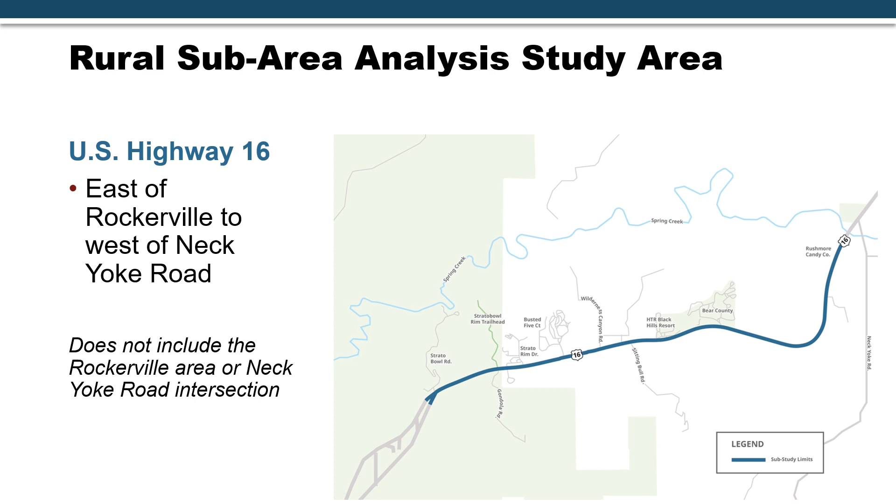The Rural Sub-Area Analysis is a sub-area of the overarching US Highway 16 Corridor Study that was completed in 2021. That study extended from the Keystone Wye to the Cathedral Drive Fairmont Boulevard intersection in Rapid City. This sub-area analysis builds upon the overarching Highway 16 Corridor Study to provide further refinement of concepts and public outreach as the South Dakota Department of Transportation works towards implementing recommendations in a future project.

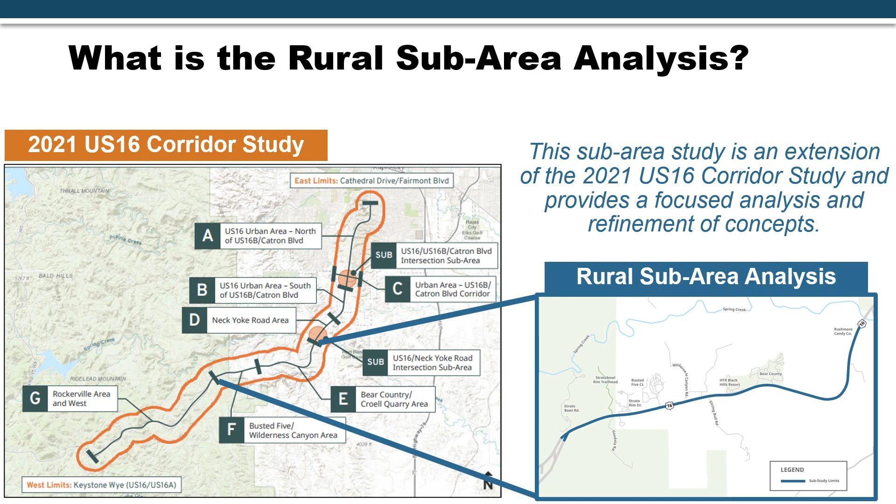Objectives of the Rural Sub-Area Analysis include updating the baseline conditions analysis, refining concepts carried forward from the 2021 US Highway 16 Corridor Study, incorporating stakeholder and public feedback throughout the process, and recommending improvements that will feed into a project the South Dakota Department of Transportation currently has planned through this sub-area within their 8-year developmental program.

And those objectives correlate with tasks in the study schedule, which is quick. We are currently in the final phase of the study to present preliminary recommendations for your review and feedback. The study team will take public input into consideration in the final step, where we will make final adjustments to concepts and recommendations, and then draft the final report.

The second part of the presentation is presenting a draft project purpose and need, which is essentially answering the question, why is a planned project necessary? The draft purpose of the project is to address local and regional trips along the Highway 16 corridor, reduce traffic congestion from continued growth and urbanization, and improve safety by addressing movements at intersections.

And this addresses the overarching needs of system connectivity and the importance of the Highway 16 corridor for local and regional trips, anticipated traffic growth throughout the corridor, and reducing angle conflicts and simplifying traffic movements.

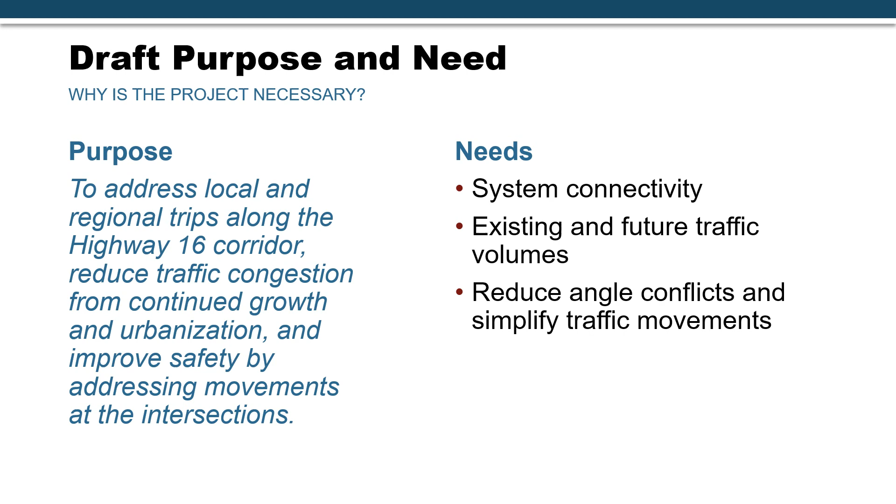Safety needs were reviewed through reported crashes between the years of 2018 and 2022. The figure shown on this slide reflects the crash density of all reported sub-area crashes excluding vehicle-animal crashes. The density figure combines crash frequency and location to help identify areas for further investigation.

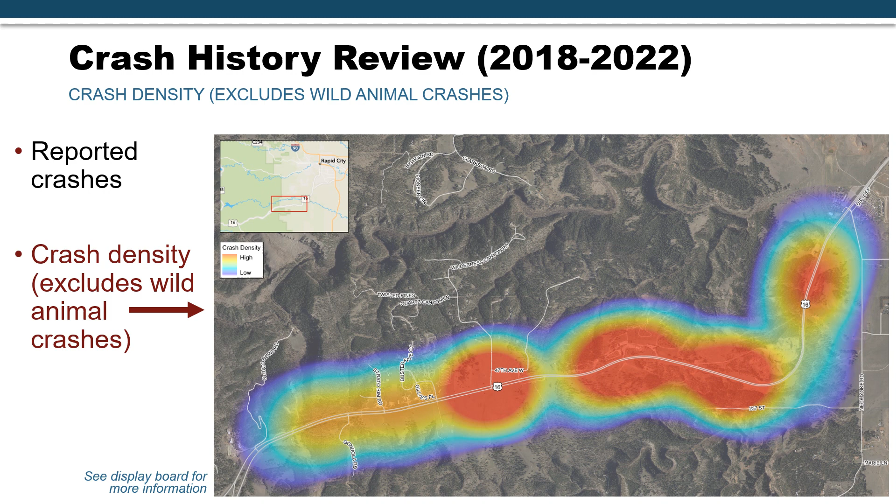Intersection crashes continue to follow similar trends as identified in the 2021 US Highway 16 Corridor Study, with rear-end crashes and angle crashes occurring at conflict points throughout the corridor. Angle crashes are a crash type of heightened concern as they often result in severe injuries due to the nature of the collision. As shown in the figure, angle crashes are prevalent and have occurred at most access points through this segment over the last 5 years.

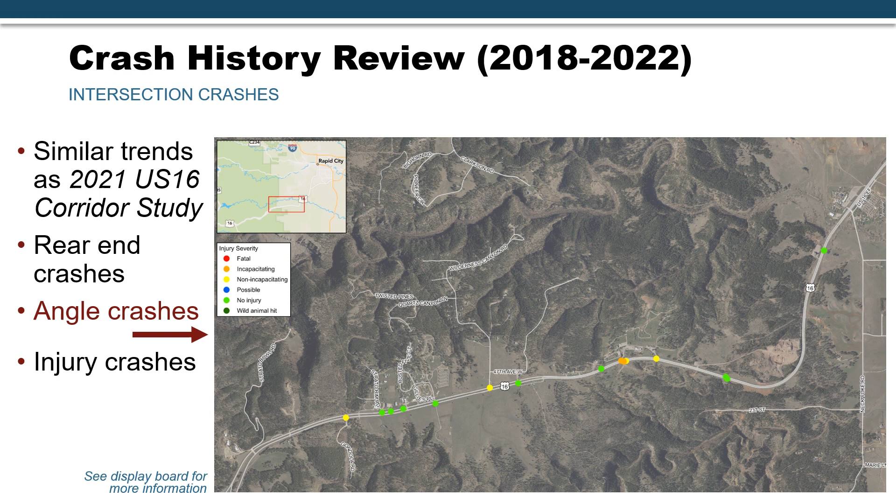The propensity for angle crashes resulting in injury and serious injury is most apparent when looking at the last 10 years of reported crashes within the sub-area. Over this time, there have been 29 reported angle crashes between Gondola Road and the Croell Quarry access. 19 of those angle crashes, or approximately 66%, resulted in an injury. 6 of the 29 crashes, or approximately 21%, resulted in a serious injury or fatality.

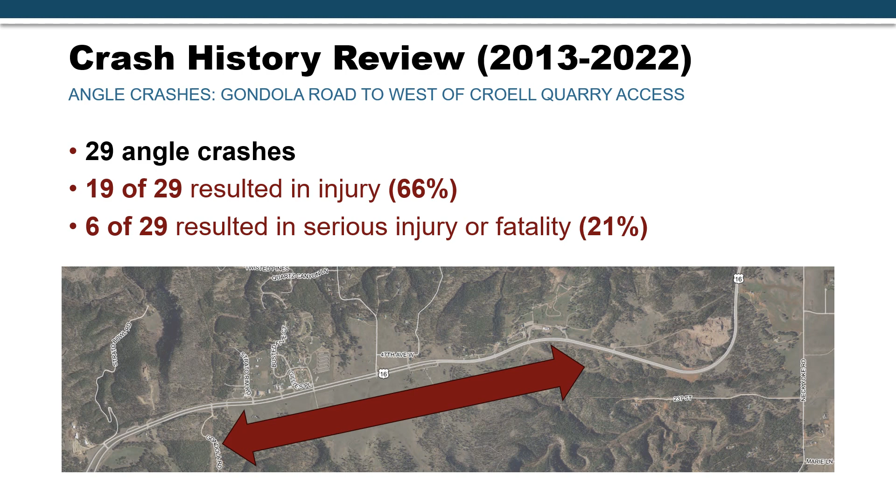The traffic volume development process included collecting traffic counts at 13 intersections in July of 2023, and then forecasting 25 plus years of traffic growth using standard planning methods that incorporate future land use, historical corridor growth, and feedback from developers and government representatives. In general, the 2050 planning traffic forecasts reflect upwards of 65% growth on Highway 16 when compared to today's volumes.

It should be noted that traffic volumes presented in this study reflect a typical summer tourist season condition with a mix of daily commute traffic and seasonal traffic.

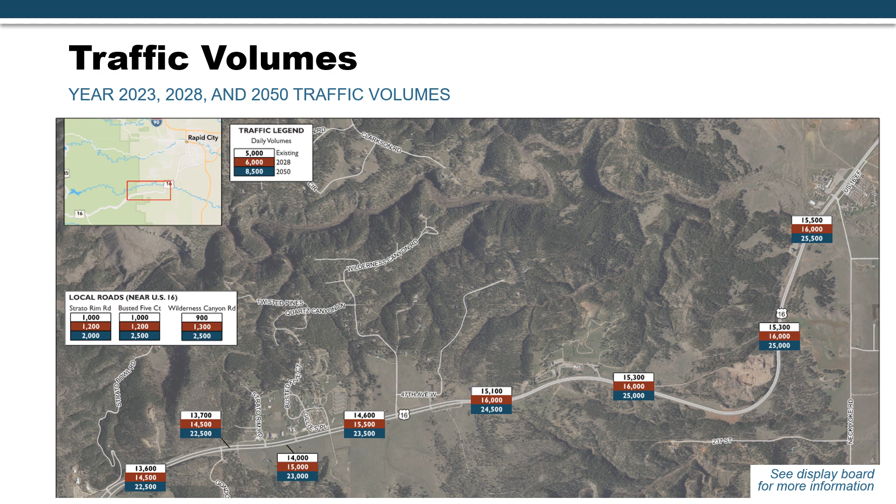Current daily traffic volumes range from around 13,000 to 16,000 on Highway 16 within the sub-area. The 2050 planned horizon traffic forecasts reflect growth of upwards to 26,000 vehicles per day just west of Neck Yoke Road. The traffic operations analysis establishes the long-range intersection improvement needs, which arise through two contributing factors.

One is a continued growth of general Highway 16 traffic passing through the study area, which we saw in the previous slide. It will become more and more difficult to find acceptable gaps to turn onto Highway 16 from a side street. The second contributing factor is the anticipated growth in side street traffic, which only exacerbates the delay and can lead to drivers taking more risks, which in turn leads to more crashes and highlights the correlation between operational and safety needs through the area.

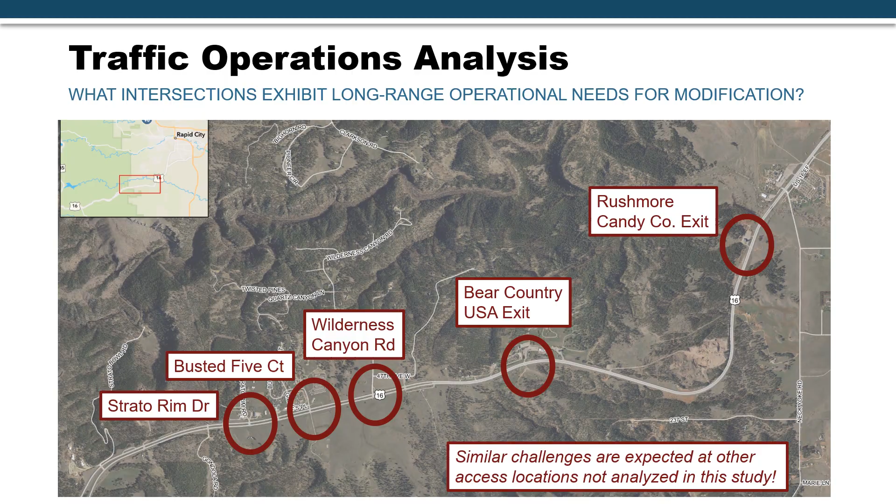The third part of this presentation provides a brief overview of the revised conceptual layouts. Please see the open house portion of the public meeting or the study website to review these layouts in more detail and what changed from November's open house.

Within the intersection concepts, there are three primary intersection types being considered. The first is a conventional intersection, similar to what is out there today, where all movements are provided at a single median opening and is stop controlled from the side street approaches. Conventional intersection concepts generally include adding turn lanes and/or median acceleration lanes.

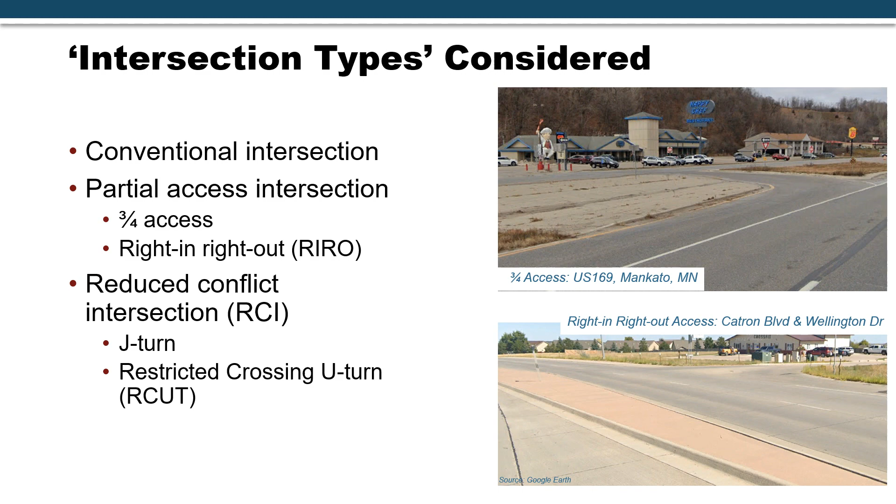The second intersection type is a partial access, where certain movements are restricted within the intersection. This includes a three-quarter access where crossing and left turn movements from the side street are not provided, or a right in right out access where only right turns into and out of the access are accommodated. The third intersection type is a reduced conflict intersection, or RCI, which is also sometimes called J-turn or an R-cut.

RCIs are an alternative intersection type that simplifies traffic movements to allow motorists to focus on one direction at a time and eliminates left turn and through movement angle conflicts for vehicles entering the intersection from the side street. As shown in the figure, all side street traffic turns right from the side street approach to enter the intersection.

Side street traffic wanting to head through the intersection or turn left can turn directly into a median auxiliary lane and travel down to the U-turn location outside of the two higher speed through lanes on the highway. Traffic then makes a U-turn and travels back to the main intersection where they can either turn right or continue straight on the highway.

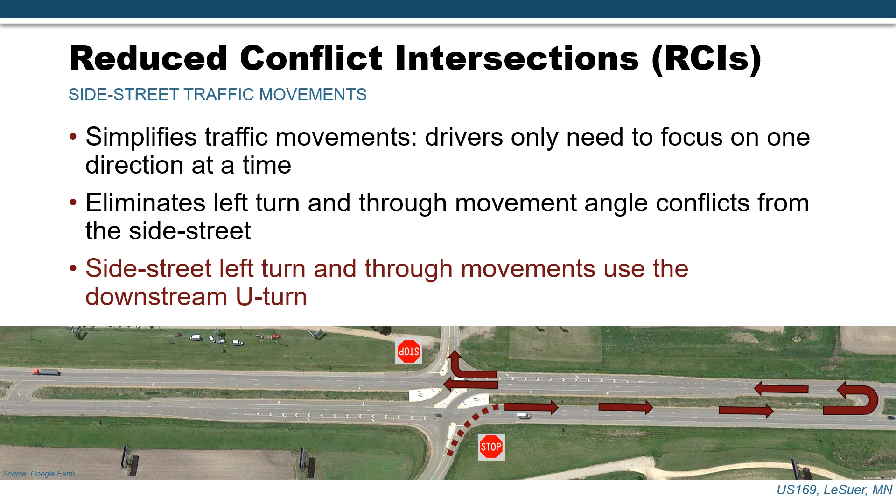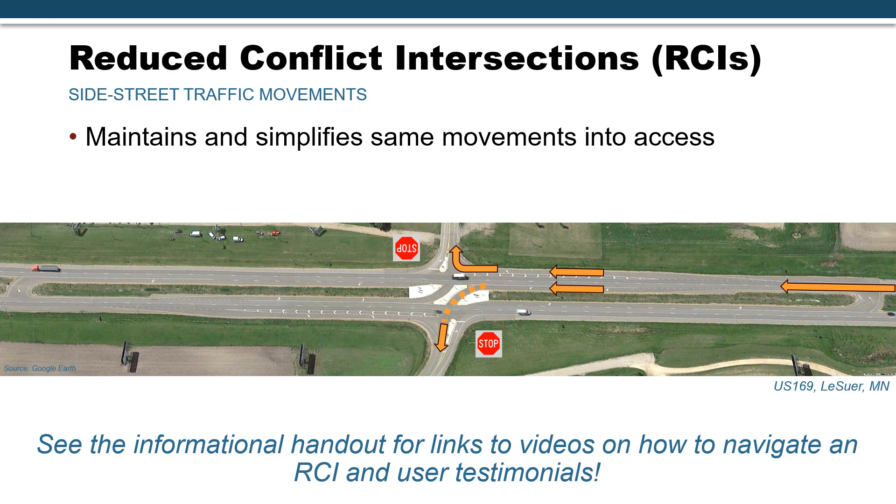Intersection movements are also simplified for traffic turning from the highway to the side street. Both the left and right turns into a side street or driveway access occur at the main intersection, but the left turns are channelized to eliminate conflict points within the median, and right turn lanes are offset to provide enhanced sight distance for right turning traffic at the side street stop signs.

Conceptual layout scenarios are grouped in the following four areas: the Strato Rim, Busted 5, Wilderness Canyon area, the HTR Black Hills Resort area, the Bear Country USA area, and the Rushmore Candy Company area. We would like to note that each concept has been revised since the last public meeting open house to incorporate public, stakeholder, and study advisory team feedback.

The Strato Rim, Busted 5, Wilderness Canyon area Scenario A reflects three RCIs constructed at those main intersections and on the existing Highway 16 alignment. Similar to the other concepts, these main intersection RCIs provide the framework for full access intersections that future area development will need to tie into.

Scenario B reflects modifications to existing Strato Rim Drive, Busted 5 Court, and Wilderness Canyon Road intersections to add turn lanes and median acceleration lanes for side street left turns to head towards Rapid City. Scenario C is the first of three RCI concepts that shift the Highway 16 corridor to the south to provide room for a frontage road on the north side for driveway access.

This first concept combines the Strato Rim Drive and Busted 5 Court intersections to a single RCI and centers it between those two roadways. An RCI is also provided at Wilderness Canyon Road. The Highway 16 alignment is shifted south to provide 250 feet separation between the frontage road and Highway 16 travel lanes.

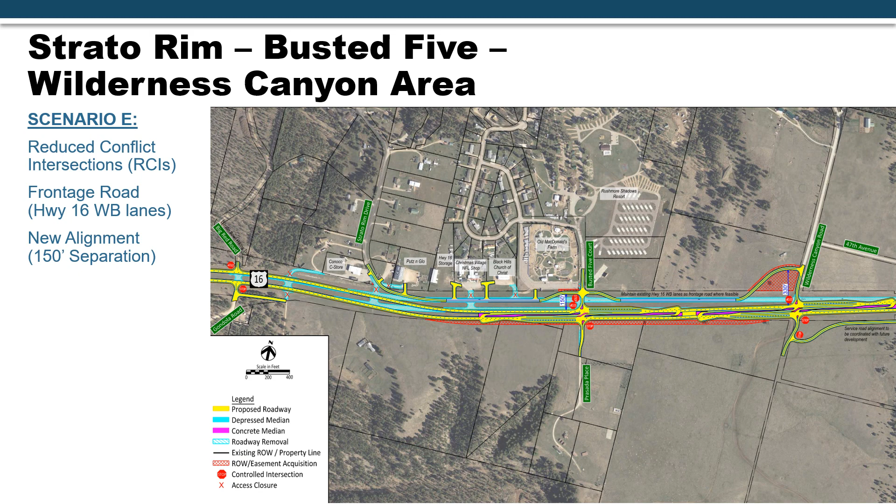Two U-turn options were developed for a westbound to eastbound U-turn for Strato Rim trailhead traffic wanting to head east from the trailhead parking lot. One option includes the existing Strato Bowl Road intersection, and the second is the closest feasible location west of the trailhead access.

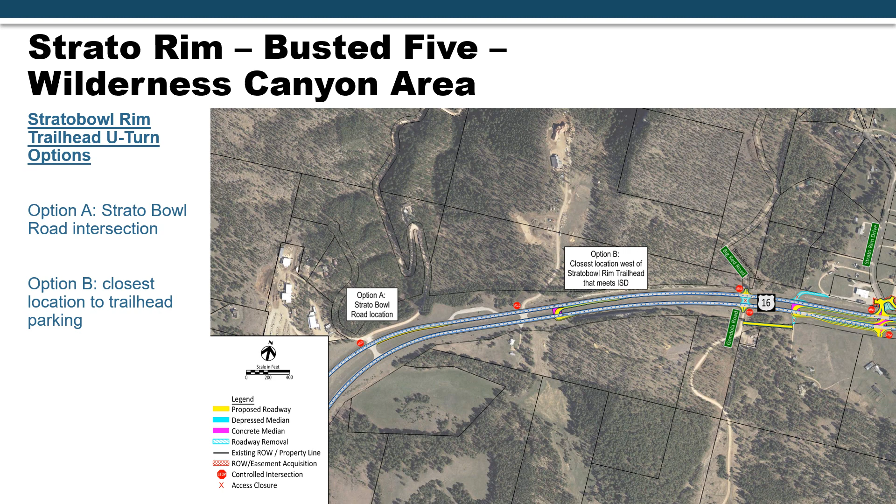The HTR Black Hills Resort Area concept refinement resulted in 4 scenarios that exhibit a mix of RCIs, partial access, and closures. Scenario A is the most restrictive form from an access management standpoint, with only providing 3-quarter or right-in right-out access. Scenario B incorporates an RCI at the HTR Black Hills main driveway and a 3-quarter access at the House of Scandinavia access and Sitting Bull Road intersection.

Scenario C provides an RCI at the HTR Black Hills main access, but shifts the U-turn west to the top of the hill to provide enhanced sight distance for U-turning traffic. A 3-quarter and right-in right-out access are provided at the House of Scandinavia and Sitting Bull Road intersections, respectively.

Scenario D also provides an RCI at the HTR Black Hills main access, but shifts the main access driveway to the east to provide greater sight distance for U-turning traffic within the RCI. A 3-quarter access is provided at both the House of Scandinavia and Sitting Bull Road.

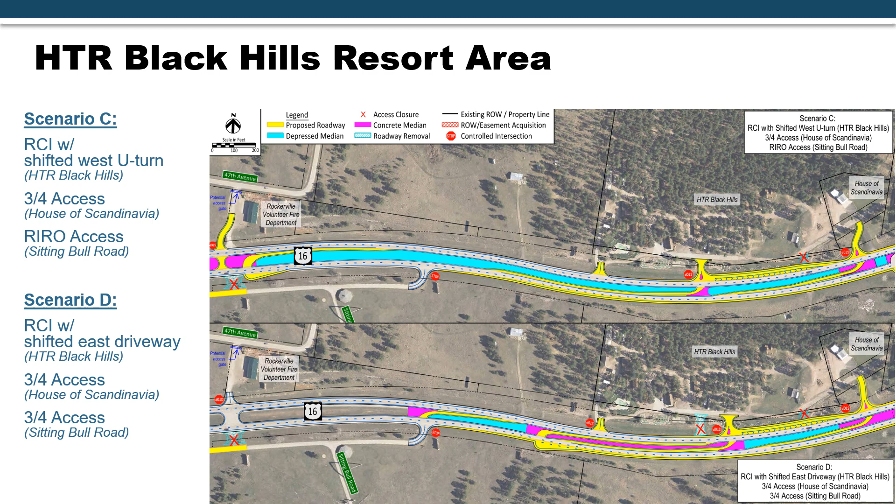The Bear Country USA area concept constructs an RCI at the Bear Country exit and a 3-quarter access at the Bear Country entrance. And finally, the Rushmore Candy Company area concept incorporates a right-in right-out access at the northern access and an RCI at the southern access. The southern access is shifted slightly to the south to provide US16 access to all 3 parcels that come into a point in that area.

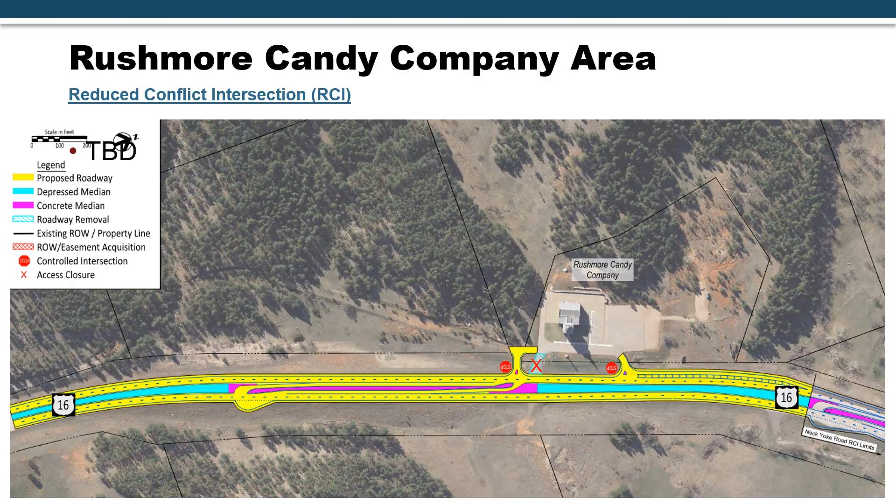The fourth section of this presentation focuses on preliminary recommendations for Highway 16 subarea corridor segments. Intersection type recommendations and supporting information will be presented first, followed by recommendations for the specific conceptual layouts.

The study team is recommending that all subarea intersections designated as future full access intersections be modified to incorporate a reduced conflict intersection, and all other access points be modified to partial access intersections such as a 3-quarter access or right-in right-out access. Traffic patterns impacted by the turn restrictions at partial access locations will be accommodated at a downstream U-turn within one of the RCIs.

The 2 exceptions include the Rockerville Volunteer Fire Department access and the Croell Quarry access. Both have unique circumstances where it is beneficial to maintain the median break that is currently out there today.

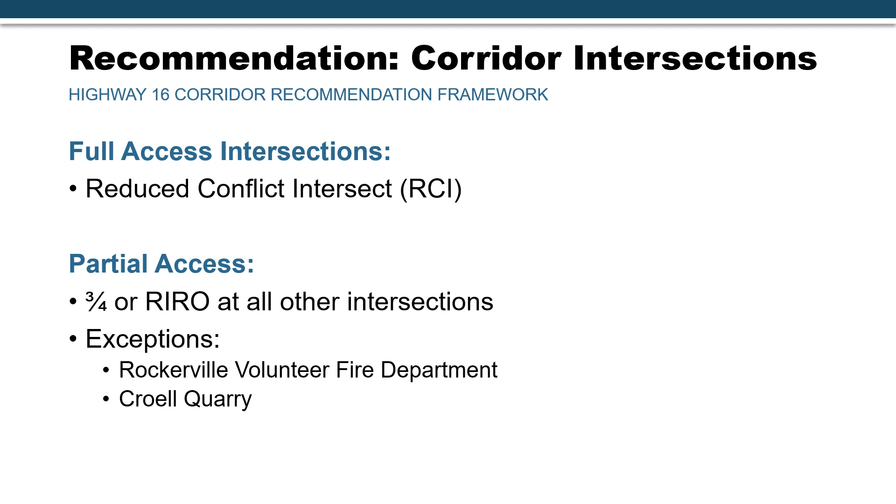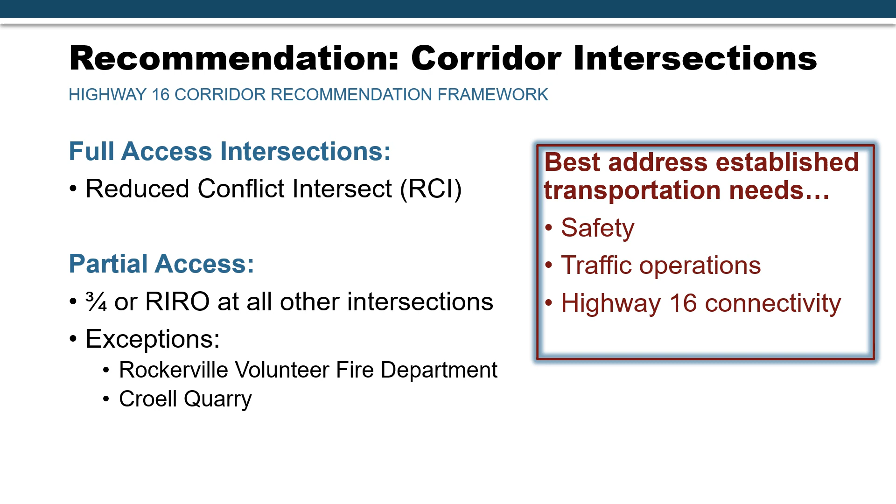These intersection recommendations best address the established transportation needs of safety, corridor and intersection operations, and Highway 16 connectivity through the subarea. It also prioritizes Highway 16 east-west through movement travel in accordance with the overarching 2021 corridor study. The following slides highlight data and analysis findings considered by the study team when developing these recommendations.

An RCI is one of 28 proven safety countermeasures identified by the Federal Highway Administration for their effectiveness in reducing roadway fatalities and serious injuries. The primary benefit of RCIs is a reduction in intersection conflict points, particularly left turn and through movement angle conflicts that have a propensity for high severity crashes.

A conventional intersection on a 4-lane expressway, similar to those on Highway 16, has upwards of 42 conflict points, with 24 of those being crossing or angle type conflicts. Depending on how an RCI is designed, the total conflict points can be reduced to 24 or even fewer. The most notable reduction is to angle conflict points, which are reduced from 24 in a conventional intersection to just 4 in an RCI.

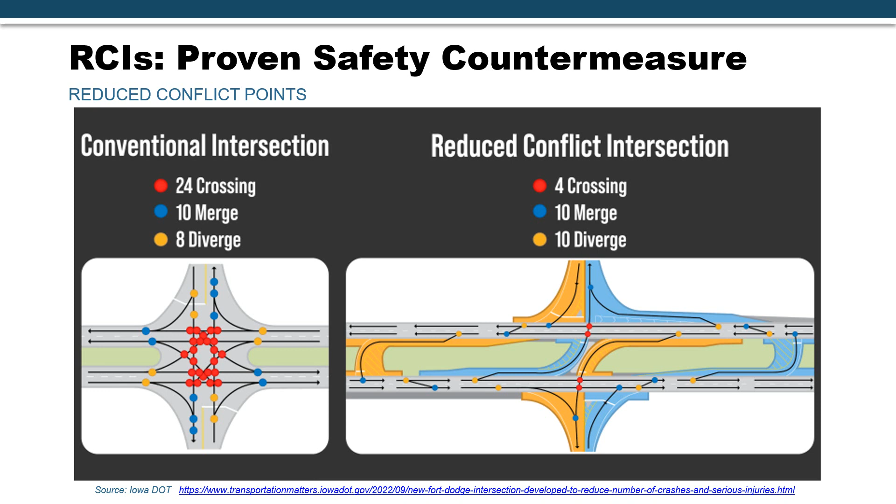A second benefit is that conflict points within RCIs are spread out across a considerably larger intersection footprint, and motorists only need to consider one direction of travel at a time, which considerably simplifies the driving process.

RCIs also provide the best traffic operations for travel through the Highway 16 corridor by prioritizing east-west free-flow travel and meeting driver expectancy and route continuity expectations for an expressway facility. RCIs are able to provide several full access intersections along the corridor for existing and future development and enhance traffic operations during high volume periods of the day.

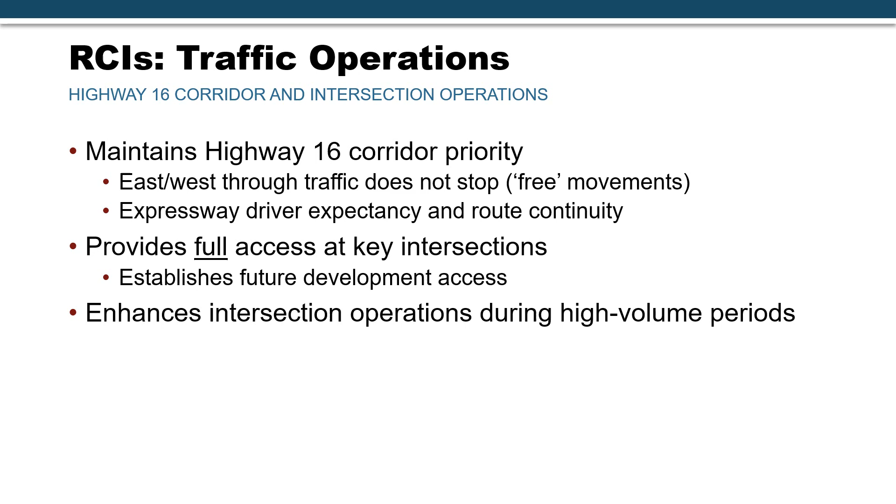The traffic operations analysis of an RCI under future year traffic conditions highlights the benefits of simplified navigation through the intersection. In year 2050 planning horizon volume conditions, it is expected that traffic wanting to turn left from the side street will be able to travel through an RCI U-turn and back to the central intersection quicker than waiting for a gap in two directions of traffic in a conventional intersection. The analysis shows a time savings as high as 40 seconds with an RCI to complete this movement.

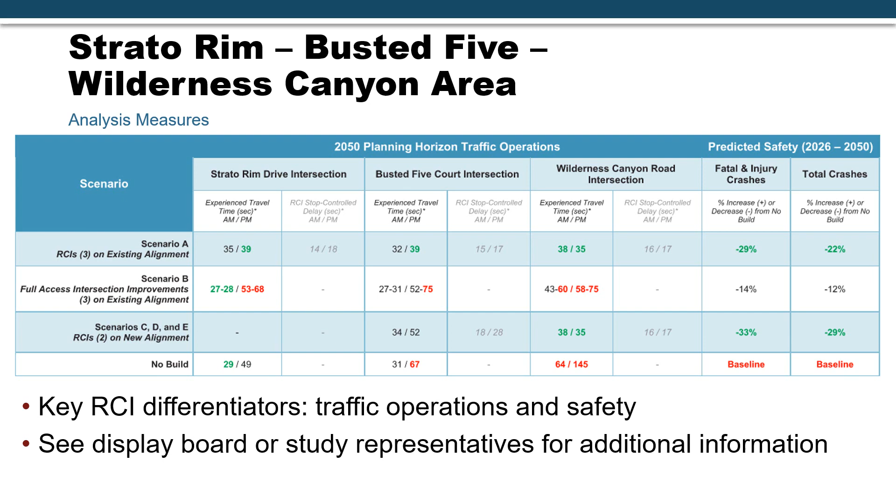The predictive safety analysis also highlights the benefits of reduced angle crashes, where scenarios with RCIs were expected to reduce fatal and injury crashes by upwards of 33% over the next 25 years. The following slides present the study team's preliminary recommendations for each of the 4 areas within the study corridor.

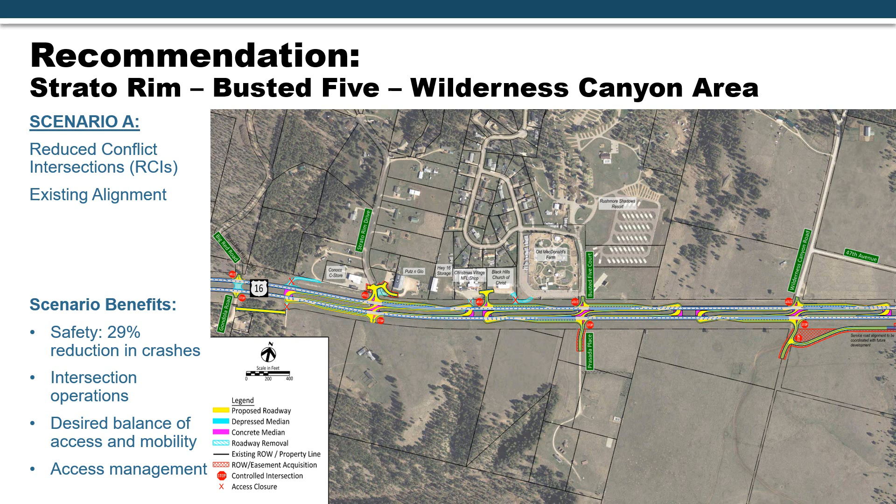The preliminary recommendation for the Strato Rim Busted Five Wilderness Canyon Road area is Scenario A. This scenario constructs 3 RCIs at the main intersection and incorporates access management through closures and right-in right-out access modifications. This scenario is recommended based on the safety benefits, intersection operations, achieving the desired balance of access and mobility, and the minimal impact to adjacent property north and south of the corridor.

In conjunction with the Scenario A preliminary recommendation, the study team is also recommending option B for a U-turn location west of the Strato Rim trailhead. This location is just west of the rock cut where a sight distance and flat area along the corridor is conducive for a U-turn. This reflects the closest feasible location west of the trailhead parking access for a U-turn location.

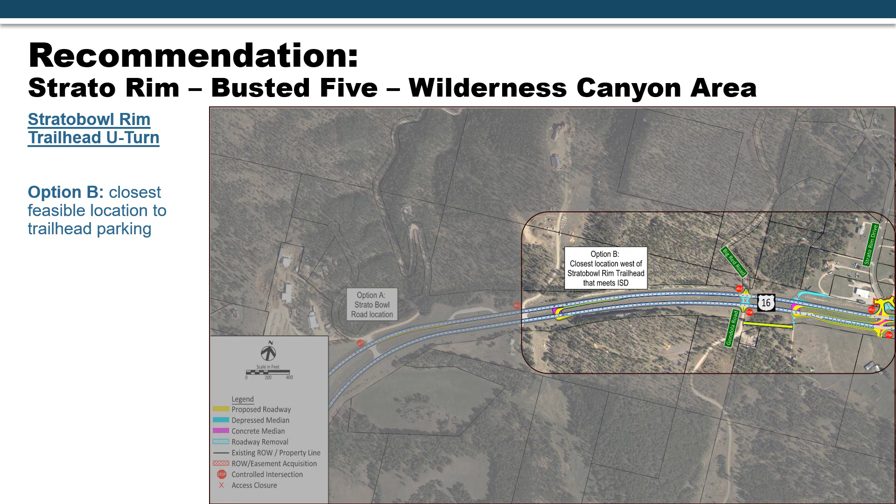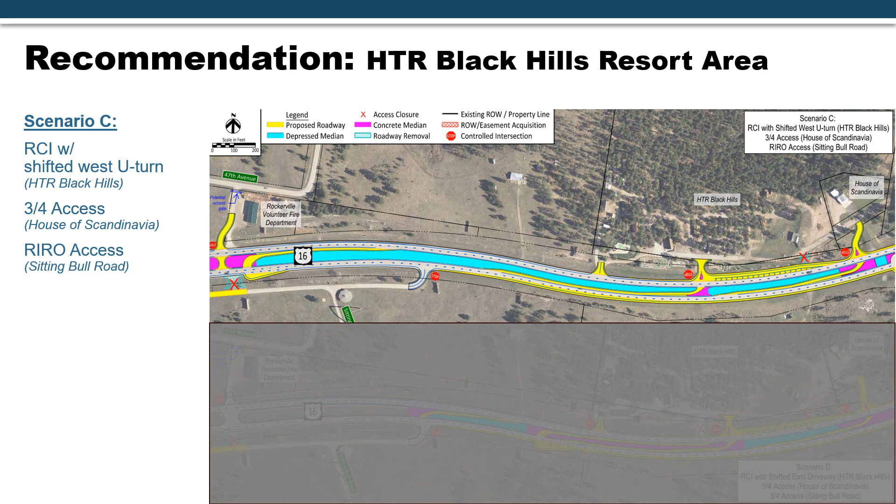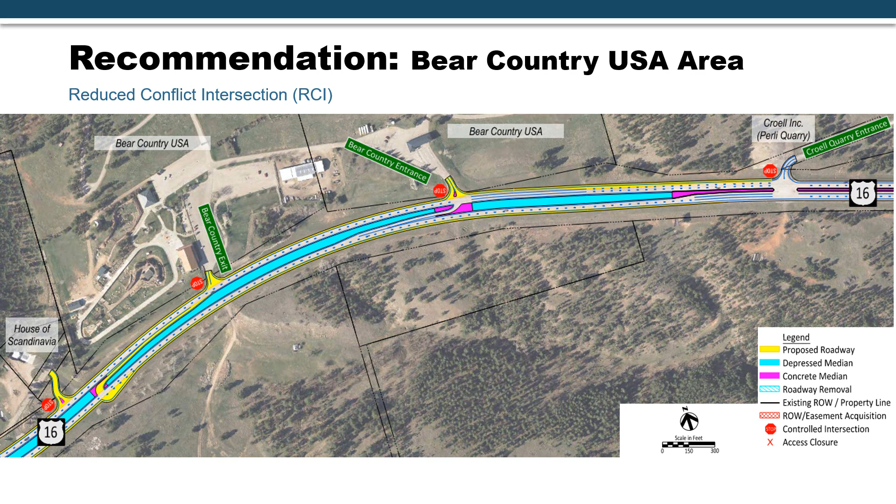The Bear Country USA area recommendation is the lone concept developed for this area, which includes an RCI at the Bear Country exit and a 3/4 access at the Bear Country entrance. And finally, Rushmore Candy Company area recommendations include a right-in right-out access at the north driveway and an RCI at the south driveway. The southern access point is shifted slightly to the south to provide Highway 16 access to all 3 parcels that come into a point in that area.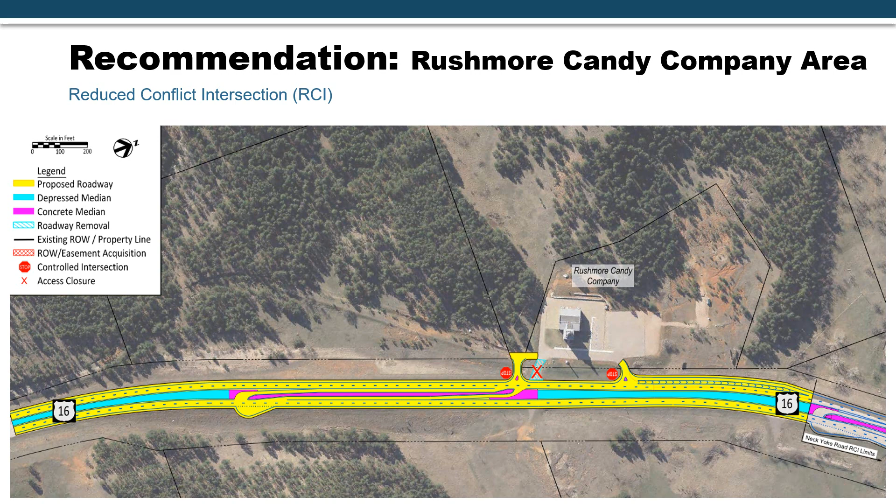Before closing the presentation, we would like to touch on a few common questions and comments the study team has received to date. We'd first like to note that the study team has done extensive research on best practices and lessons learned from other states and incorporated many of these elements into the presented concepts. Examples of these best practices include extending the median U-turn lane back to the main intersection, extending turn lane lengths within RCIs and at partial access locations to incorporate as much distance as feasible for vehicle deceleration, and accounting for significant roadway grade when applicable.

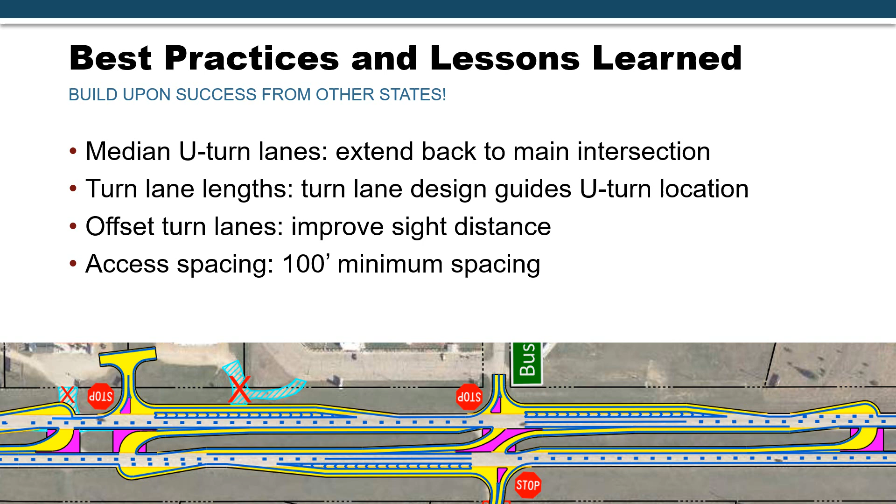For enhanced side street traffic sight distance, Highway 16 right turn lanes are offset from the through lanes to provide greater sight distance for traffic turning onto Highway 16. And also, access points have been separated from U-turn lanes by a minimum of 100 feet to help separate conflict points.

A common concern resonating from the comments received to date centers on whether trucks and RVs will be able to make the U-turn and that their slow turns will lead to crashes. First, we want to stress that large vehicles have been accounted for using current design guidelines that incorporate operational considerations, wider turn paths at U-turns, and appropriate intersection sight distance for slower turn movements.

A 2016 study completed by the Minnesota Department of Transportation and Iowa State University provides good insight on these concerns as well. Researchers monitored RCIs and conventional intersections to compare the exposure of large vehicles to oncoming traffic when completing turns, as well as the frequency of evasive maneuvers caused by these turns. The results of the study may be surprising. The exposure of large vehicles completing a turn within a conventional intersection is greater than those within RCIs, even for the U-turn movement.

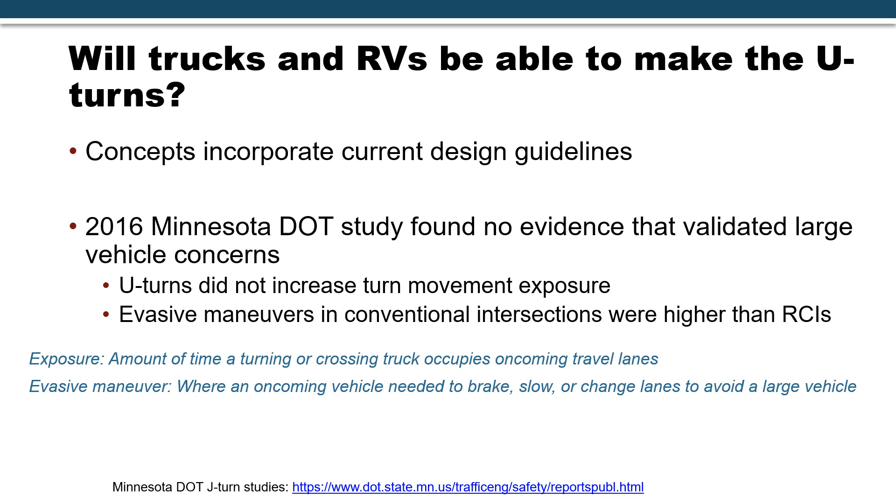A second key part of this is that the exposure conflict within a conventional intersection is more likely to result in an angle crash, while the exposure conflict in RCI is more likely to result in a rear-end or sideswipe crash. When reviewing evasive maneuvers, it was found that the conventional intersections had a rate of evasive maneuvers that was twice that of the analyzed U-turn locations. The study concluded that there was no evidence that validated concerns of large vehicle operations at RCIs.

Another question is, will RCIs work with future development? And the answer is yes. The recommended RCIs establish the full access intersections for future development along the corridor. From an operations standpoint, RCIs are better able to grow with traffic than a conventional intersection. The traffic operations analysis shows that at the higher volume RCIs in particular, the side street RCI operations continue to operate acceptably well after those same movements fail in a conventional intersection under the same traffic conditions.

Further, an unsignalized RCI prolongs the need for signalizing intersections in this area. It is recommended that the South Dakota Department of Transportation, Pennington County, property owners, and developers all work together to enhance internal connectivity and help balance traffic across multiple full access intersections.

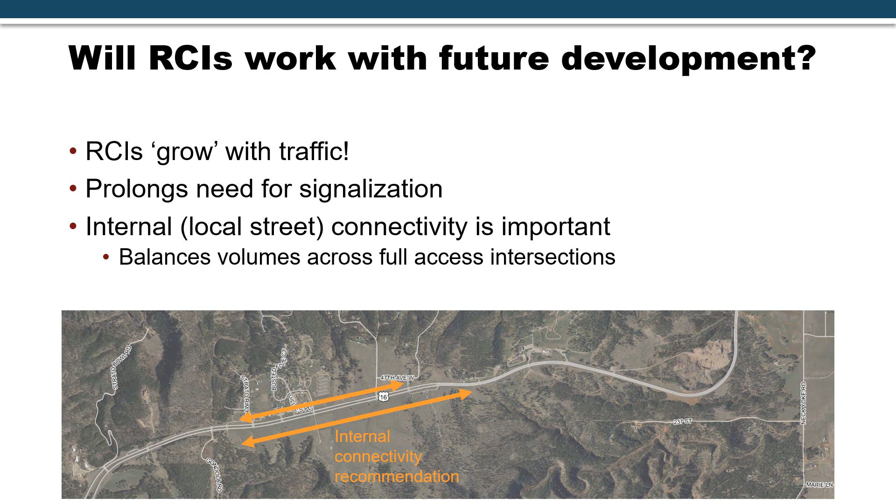Another common question is, why construct an RCI if traffic volumes are only high during a few months of the year? The study team certainly recognizes there are times of the year and times of the day where there are no issues turning in and out of an access point along Highway 16. However, in the last 10 years, approximately 38% of the angle crashes in the sub-area are still occurring during lower volume conditions between Labor Day and Memorial Day.

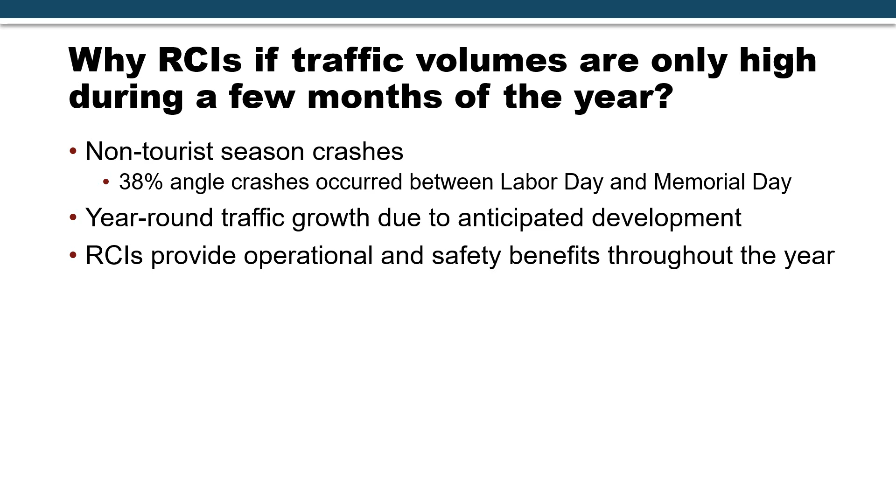Further, we expect widespread residential and mixed-use development along the corridor and throughout the area to contribute to year-round traffic growth. RCI safety benefits of reducing angle conflicts are there whether volumes are low or high. So the safety benefit of this intersection type is 24 hours a day, 365 days a year. Further, as traffic volumes continue to grow throughout the area, the intersection accommodates that growth and continues to provide those same safety benefits.

Several questions have been asked about just keeping the existing intersections and adding median acceleration lanes. The median acceleration lane concept shows some safety benefit, which is expected as vehicles turning left from the side street can enter their own lane on the far side, accelerate, and then merge into Highway 16 mainline lanes. Minnesota Department of Transportation research findings note that median acceleration lane safety benefits are generally most applicable at locations with high volumes of trucks entering and exiting a single point, similar to the coal quarry access.

However, research has also shown that median acceleration lanes do not reduce serious injury crashes because near-side angle conflict points are still present and may actually increase the number of minor crashes. A big issue with median acceleration lanes is compliance, particularly in areas with unfamiliar drivers, and whether they are used correctly or even used at all. Traffic not using the acceleration lane reinstates the far side angle conflicts within the intersection.

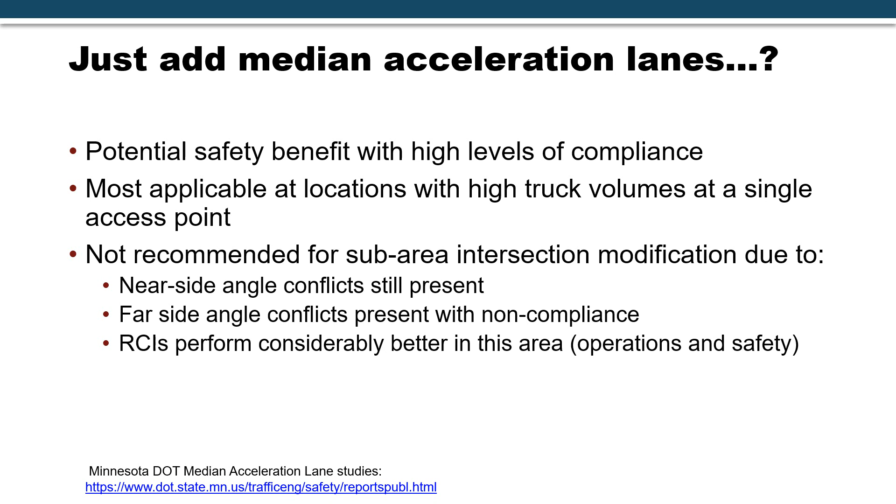A follow-up question is often, what about adding a traffic signal? First, volumes are not close to meeting traffic signal warrants outlined by the Manual on Uniform Traffic Control Devices, or MUTCD. Second, a traffic signal will be expected to increase overall intersection delay for both the Highway 16 through movements and the side street movements.

National research has found that installing a traffic signal at unwarranted locations and/or isolated rural locations can actually lead to an increase in crashes. Further, a traffic signal does not eliminate the higher severity angle crash conflicts. However, if or when the time comes to review the next step in intersection control, signals can be incorporated into an RCI, and the same benefits of eliminated angle conflict points are still applicable.

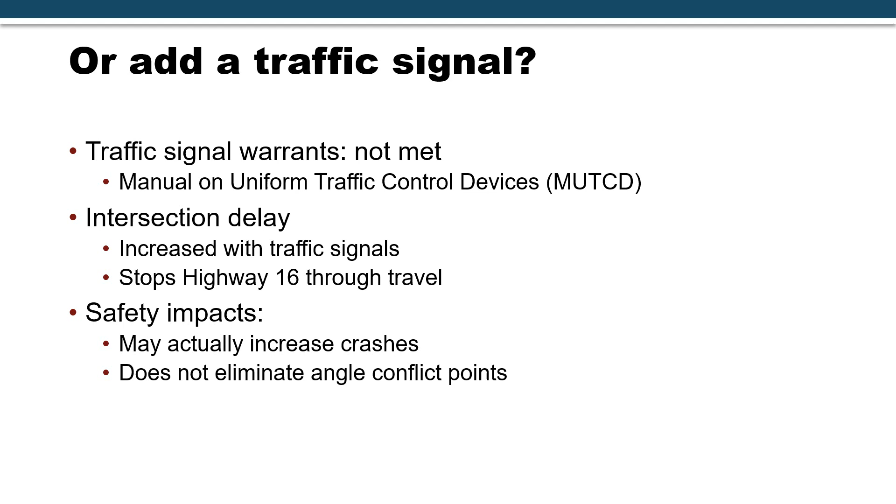And finally, to conclude the presentation, we'll touch on a couple opportunities to provide feedback and next steps. As a reminder, as part of the second public meeting open house, we are looking for your feedback on preliminary recommendations and updated concepts. There are several ways to provide your feedback. One is to leave your comment card here as part of this public meeting open house. Second is to reach out to any of the study contacts. And the third is to submit your comments directly through the study website.

And this concludes our presentation. We would like to thank you for your interest and participation in the study. We'd appreciate comments by December 29th so we can work towards finalizing study concepts and recommendations prior to the South Dakota Department of Transportation moving into design later in 2024.